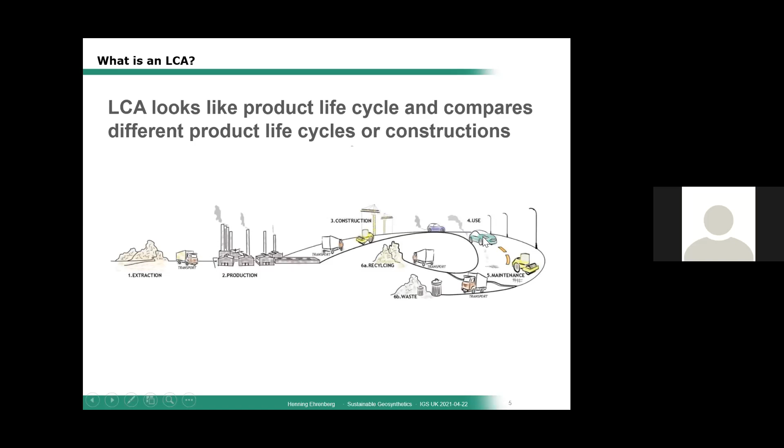Before starting with sustainability overall, we have to have a closer look at what an LCA is. An LCA always looks at the full product life cycle and compares different product life cycles or constructions. That means you do not look at only one single product for production and then stop when you supply it. You look at the whole construction, the whole production, getting the raw material, and then compare these with others. For example, it started with the extraction, and in the early days of LCAs - that was also the case in the early ones we did with the EAGM - it ends with the use of the material. With the newer ones just under preparation, coming in the next years, it goes a bit further until the moment when you recycle these products, or if recycling is not possible, put it into waste.

LCA looks at different aspects: the energy, the resources, what happens with climate change, what is with ecological impact, and also human health is an issue for an LCA. These can be one of the main parts of the sustainability analysis.

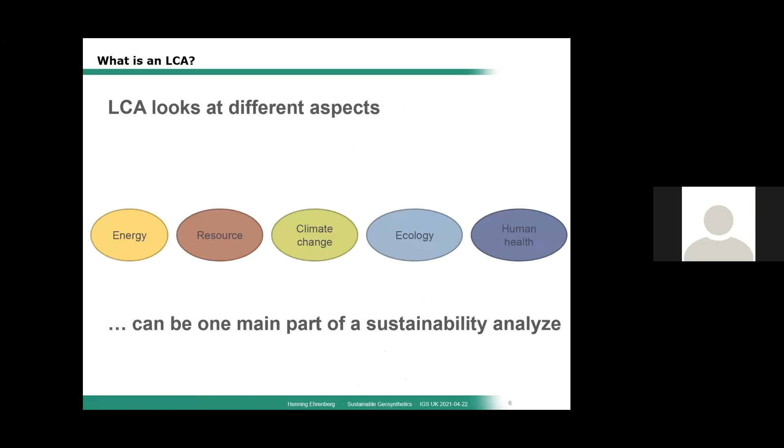If you look at the LCA, there are some main evaluated impact categories, and that, for example, is done also with the LCAs done by the EAGM. It's mainly looking at 9 impact categories.

You can see them here: greenhouse gas emission, particulate matter formation - what that means are effects that cause damages to a person, for example if you get problems with your lungs, if you have gases.

Summer smog, eutrophication - that is a part of the pollution in nature, similar with acidification. Land use is a part where you can see it in 2 different ways. One way is that you only compare 1 square meter to 1 square meter, for example in a road, or you can also identify if there are impacts on biodiversity. In these cases, especially with LCAs in construction, the difference is in how you use land use.

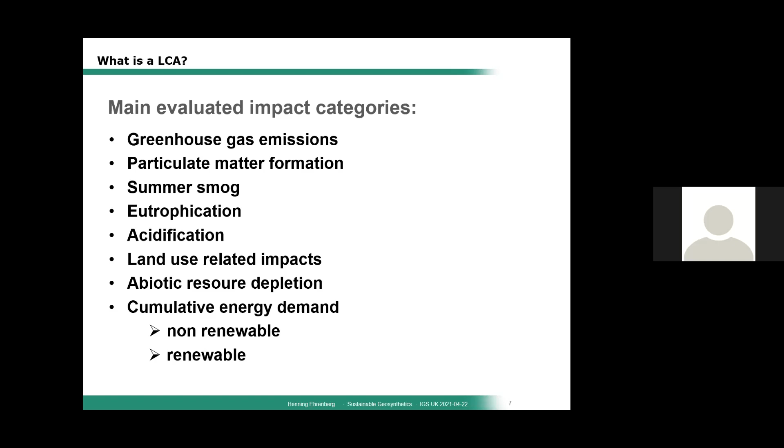Then we have the abiotic resource depletion - that means something like, for example, coming from gas. And you have the cumulative energy demand based on the non-renewable and also the renewable.

For today, we have some examples in more detail. We have the 4 LCA cases done by the EAGM in 2009 to 2011, renewed in 2019. We have a very nice case from ABG, from David Shercliff, presented first time in 2019. We have then 2 cases done by Naue, and also a new thing coming from Huesker, which I will go into in more detail.

We also have some more that I'd just like to highlight - there are more examples, and you can find literature for this, like circular economy, biopolymers, other LCAs, and for example one thing done in the UK in 2010 under the name or letters of WRAP.

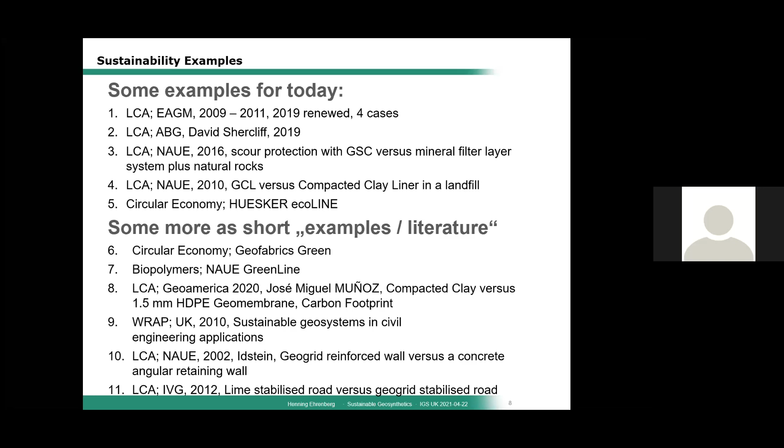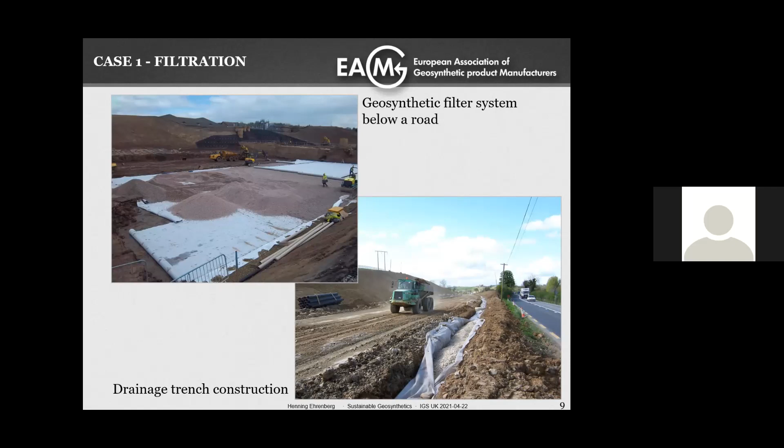Let's start with case 1 that we did with the EAGM. In that case, there was a comparison of a filter system below a road, comparing the impacts of installing a road with a gravel or granular filter versus a geosynthetic filter. You can see the differences here. In the upper part, we have a granular filter roughly 30 centimeters thick. In the lower part, we took a standard geotextile used in these kinds of applications - PP non-woven with 175 grams per square meter.

The main point of this LCA was to analyze only the differences. So everything done in exactly the same way in both cases is not part of the LCA - that's also not part of the other LCAs. It's always only a close look at where you have differences between one case and the other.

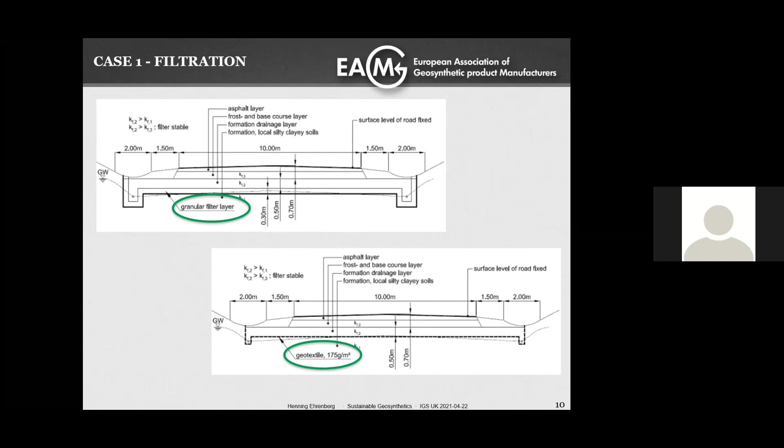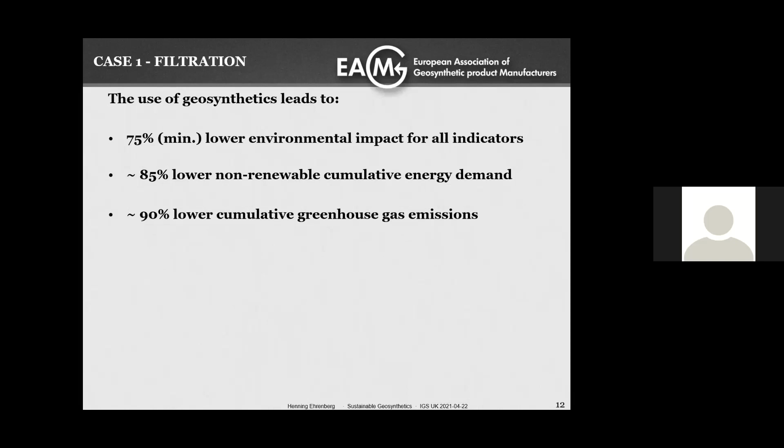So to summarize a bit, case 1 shows a much lower environmental impact for all categories. For example, if you look at the cumulative energy demand and CO2 emissions, we always have less than 20% of what we would have if we made the construction with gravel.

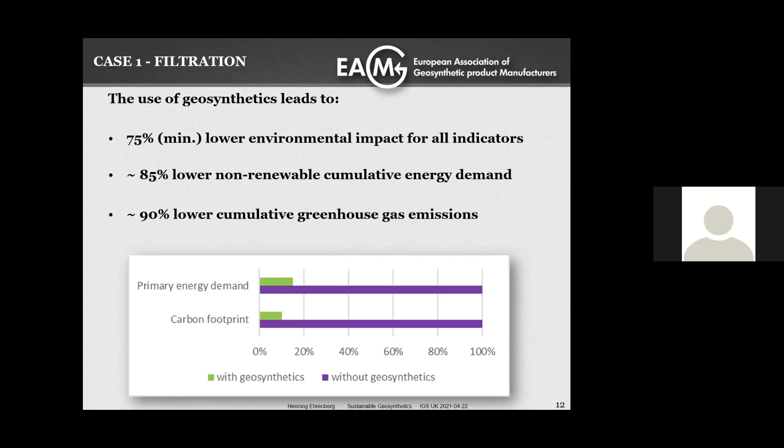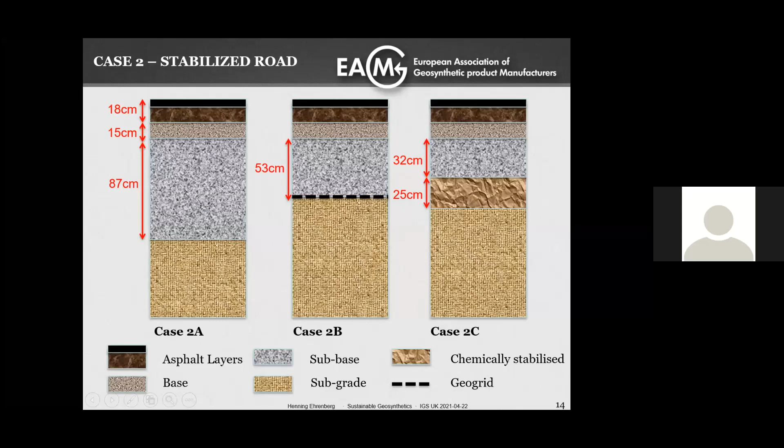If you go to the second case, that's a stabilized road, where we have the comparison in three ways: one is the change of more sub-base material, the second is installing a geogrid or geosynthetic, and the third is stabilization of the soil with lime or cement. Here you can also see directly the differences in the height of material that has to be changed or worked on.

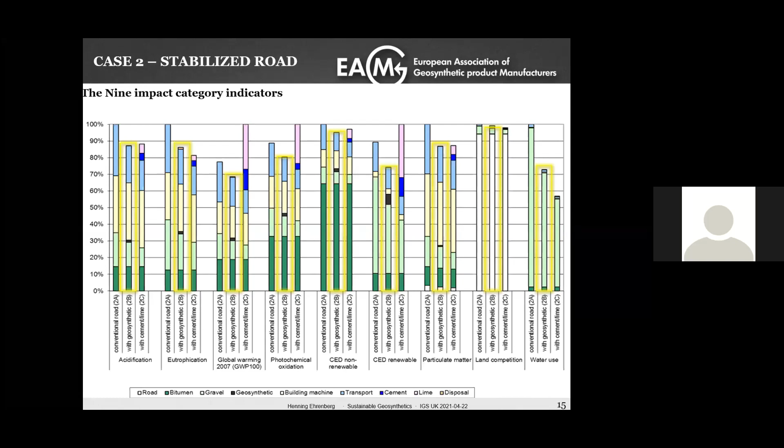These columns are a bit more, so you have to have a closer look. If you compare the classic construction with more sub-base material instead of using the geosynthetic, you can see that the number with the geosynthetic is always lower. If you compare it with cement and lime, the result is on average more or less similar.

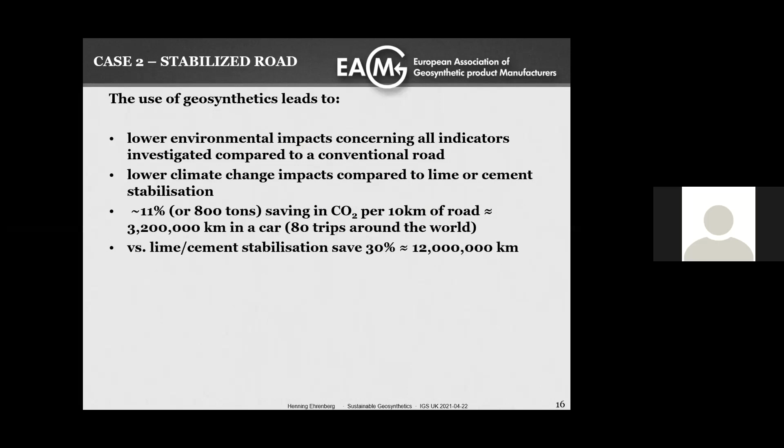But if you go into the details with the cumulated energy demand and CO2 emissions again, you can see that here the level is also a bit lower, but this depends clearly on the detailed construction and also on transportation ways.

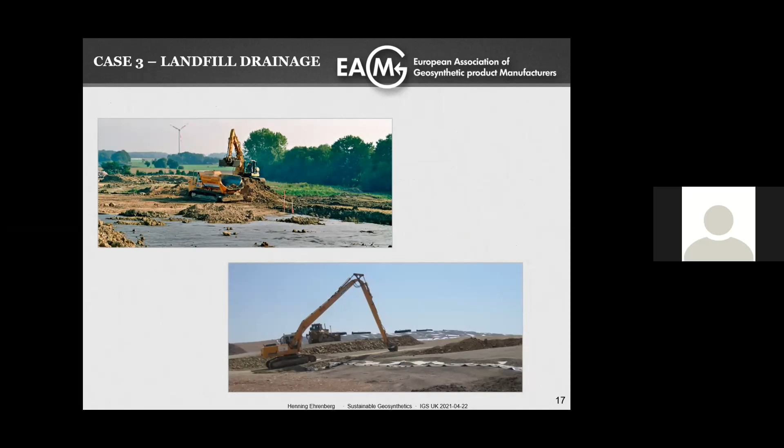The third case done in the EAMG was a landfill drainage comparison, where we compared the impact categories of a geosynthetic drainage layer with a gravel drainage layer. We took the European landfill regulation and compared these. Again, here we only compared the drainage layer, not the filter layer on top or the protection layer below, because those are the same in both cases.

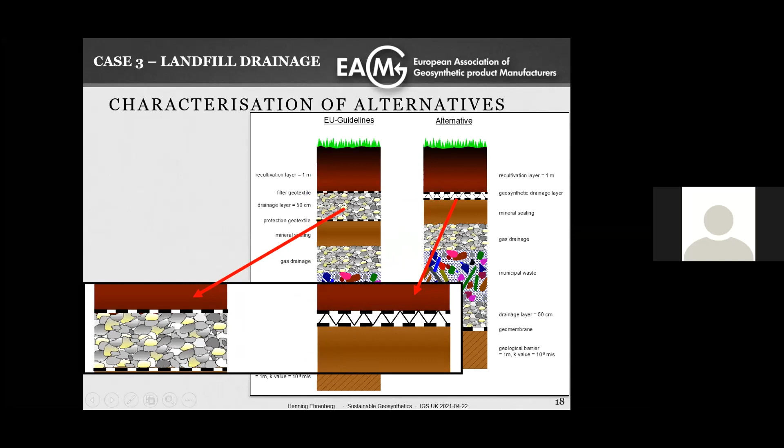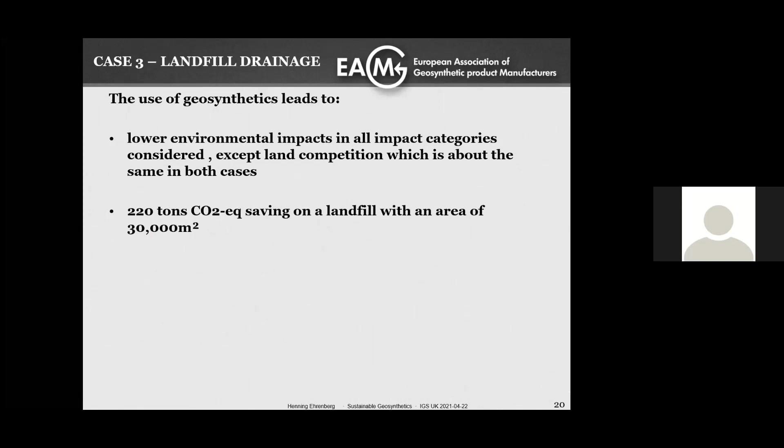If you compare these results, again, as in case 1, we have a higher difference between the classic construction with gravel material in comparison to the geosynthetic material. For example, in the case of cumulated energy demand and CO2, we have a reduction with the geosynthetic construction of 55 or 70%.

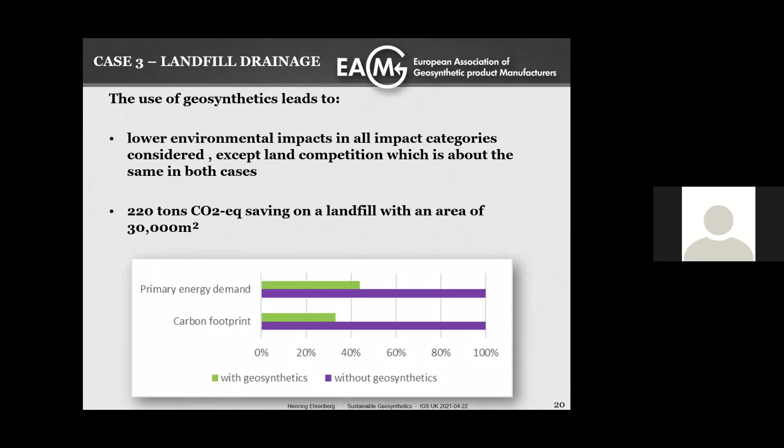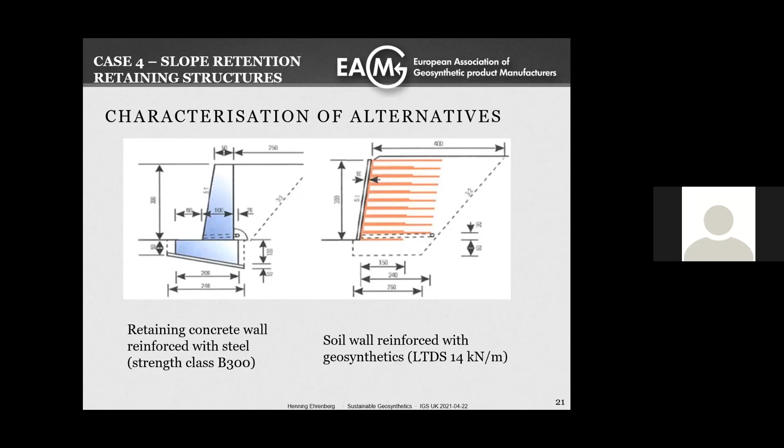Coming to the last case we worked on in the EAGM: the slope retaining structure. In one case with a concrete wall, and in the other with a geosynthetic reinforcement. For the geosynthetic reinforcement, we took as an industry average a geosynthetic with a long-term design strength of 14 kilonewtons per meter. Here are some typical pictures of the surface we could have for a retaining wall with concrete or with a geosynthetic reinforcement behind the surface.

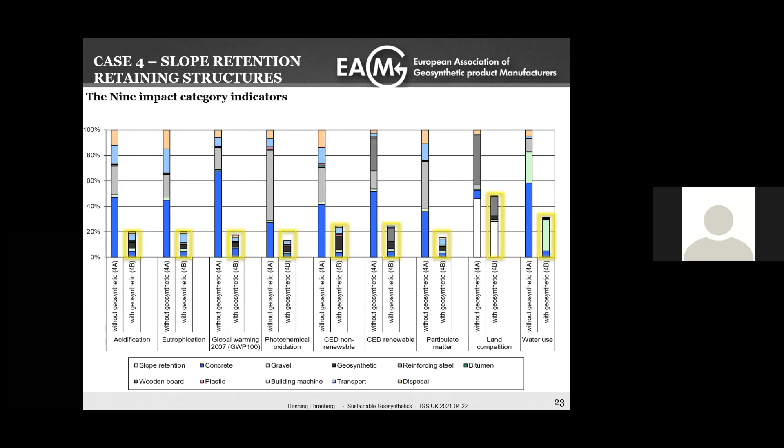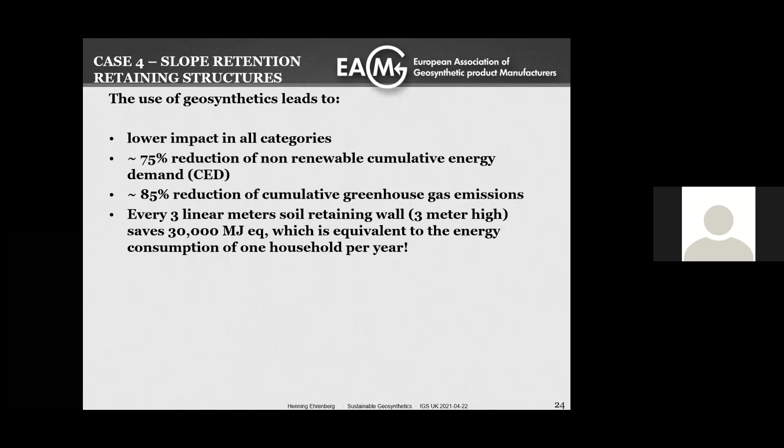Here again you can see a big difference between the construction with the geosynthetic versus the classic construction with concrete, where in most cases you have more than 70% reduction of the impacts with the geosynthetic. Especially with the cumulative energy demand, you have a reduction of 75%, and 85% reduction of the carbon footprint.

So in summary, you can say that geosynthetics can significantly reduce the impacts in most or nearly all of the 9 impact categories in a construction. And there's one main thing you have to know.

We speak about an LCA, and you might have heard of environmental product declarations. That's something some producers have for their products, and they are sometimes used on site. An environmental product declaration is very helpful for doing an LCA, because much of the data needed for a project-specific LCA is in these declarations. But an environmental product declaration alone cannot solve these questions — you really have to compare the constructions, not just the products, based only on an environmental product declaration.

More details of these studies done by the EAGM can be found on the EAGM webpage, and there are also several presentations available, for example at the EuroGeo 5 or at the IGS conference in Berlin, given by one of the people who did this LCA for the EAGM.

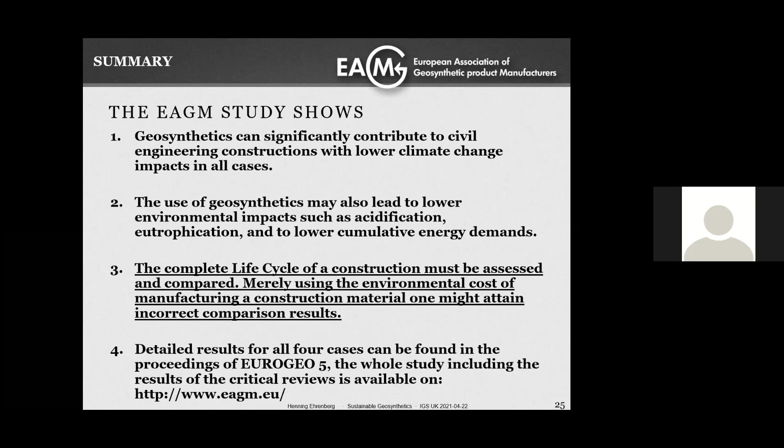Coming now to another example that is not done by the EAGM, but by a producer of products, ABG. This was presented by David in November 2019 at an IGS session in Prague, where he demonstrated the differences between two possible drainage materials in the construction of a highway.

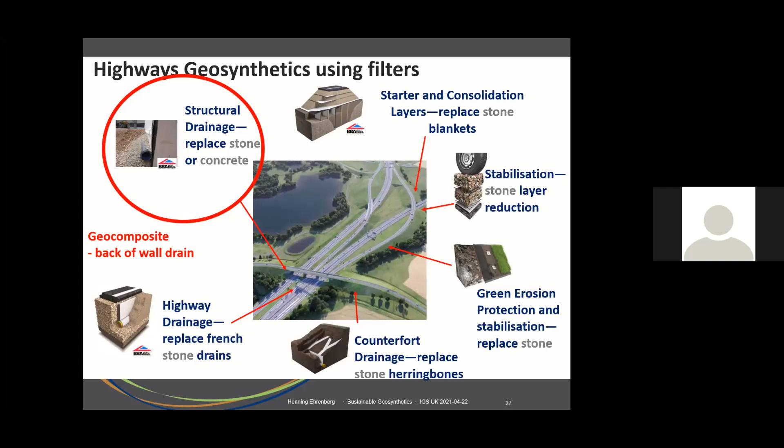You can see it's a highway in UK from Huntingdon to Cambridge. Originally there was a request to install a hollow block concrete system as the drainage material. There was a nice aspect to this project because all participants were asked to provide a calculation or environmental impact statement regarding possible alternatives to save CO2 emissions. The owner was very open to alternatives, mainly evaluated through impact statements.

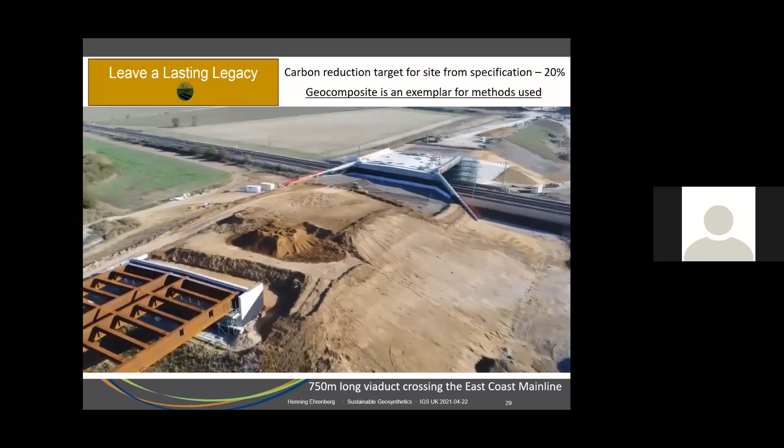Here you can see one of the bridges, for example a bridge or road that was or will be constructed to save travel time and reduce the traffic jams experienced daily in the past. Once finalized, I don't know if it's finished today, but it will save significant traffic jams and travel time.

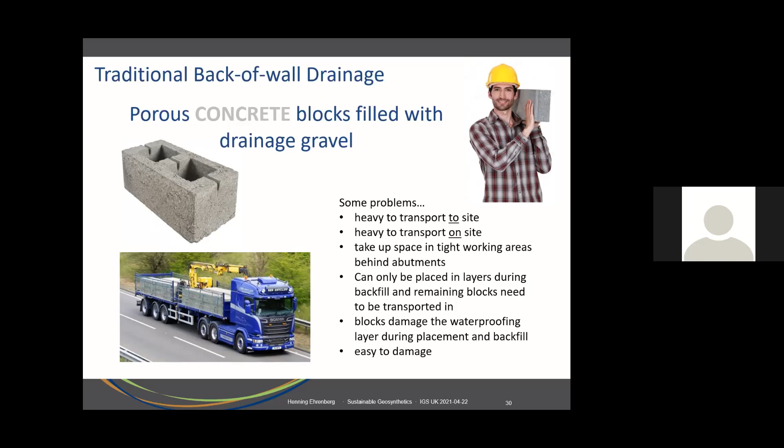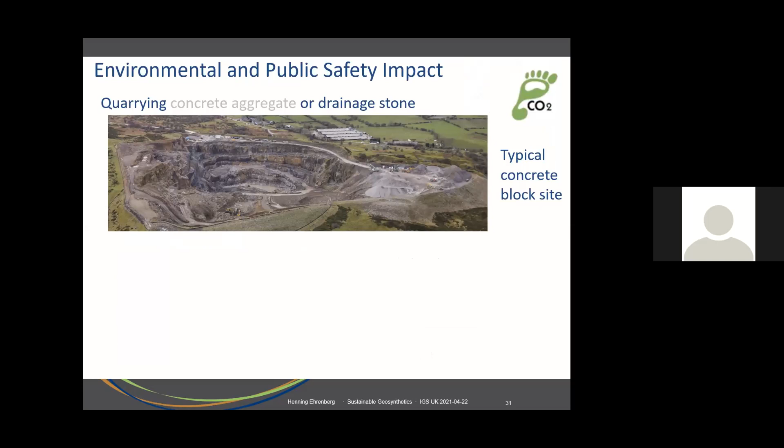As I said, originally the tender asked for a back of wall drainage using hollow blocks. You can see the typical issues with these materials: problems with heavy transport to and on site, requiring many trucks. For example, producing these concrete blocks involves high use of natural resources, as shown on the upper part of this slide, and the many trucks cause problems for public authorities and damage existing roads.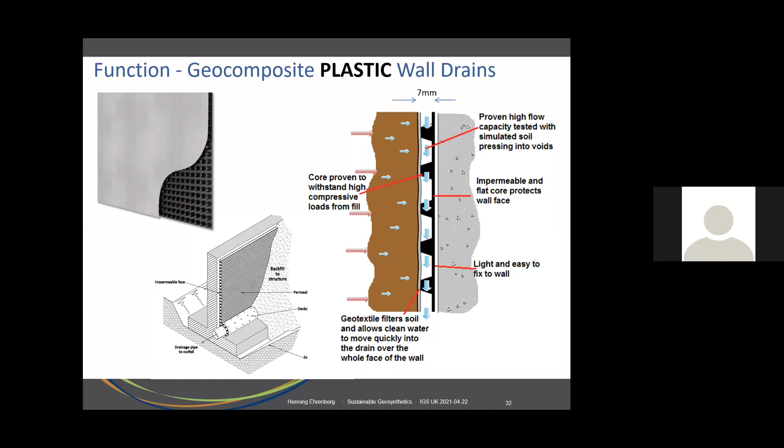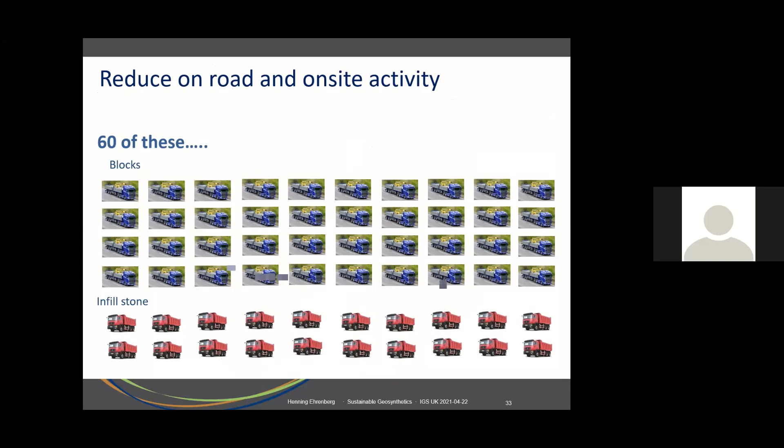In comparison, the plastic wall drains show here the principle of the material with a filter and a drainage layer, and one of the big benefits. If you have to transport all the block wall material to site, you need many trucks for the blocks and more trucks for the infill stones. For the same surface area you would drain, here you only need one truck to transport the drainage material to site.

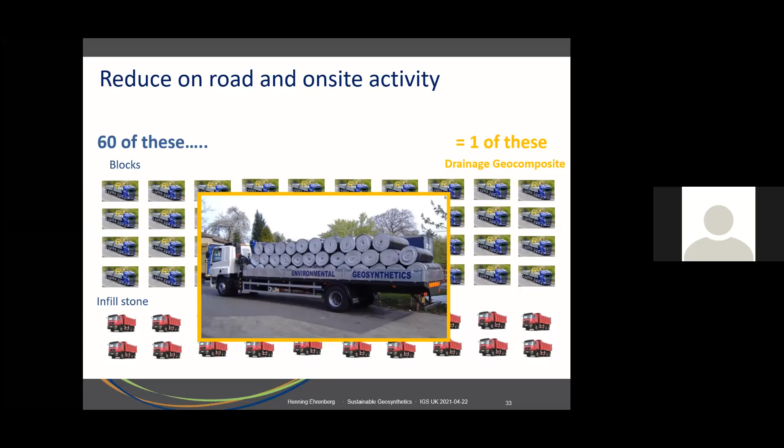Similar questions arise with transportation on site. For example, if you have 550 of these blocks covering a certain surface, you can drain the same surface with only one roll of this material. All of this has to be transported and also installed on site.

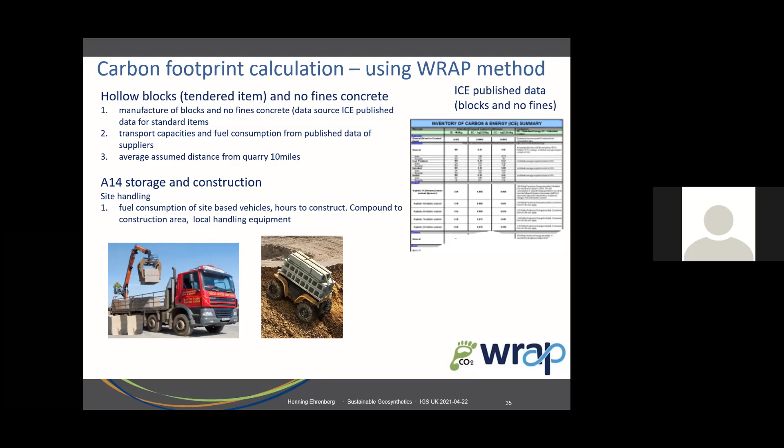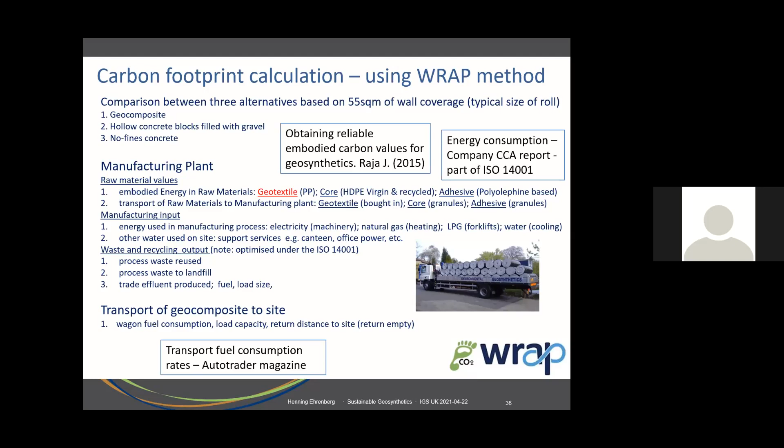One thing also done as part of this evaluation, requested by the owner, was a carbon footprint calculation using the system WRAP. WRAP was developed roughly in 2010 in the UK and serves as a base for LCA calculations on site, providing numbers and guidance. Calculating this for the hollow block system and doing the same correctly for the geosynthetic drain, you get a reduction of CO2 emissions with the geocomposite of roughly 91%.

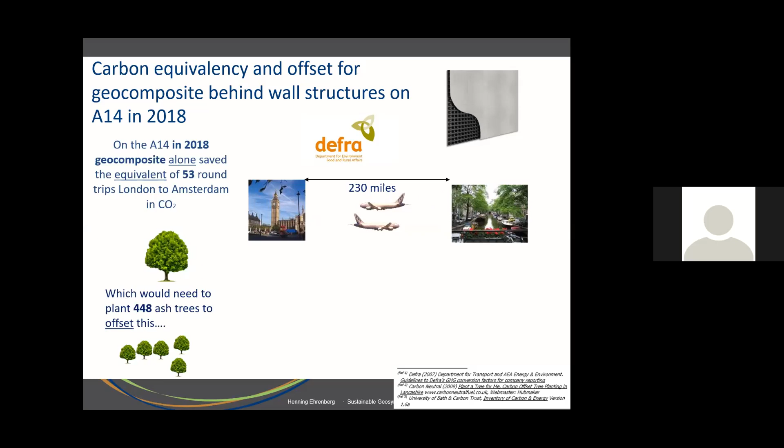What does that 91% mean? There's a nice example from Defra: he said this would save the CO2 emissions equivalent to 53 round trips by plane from London to Amsterdam and back, or alternatively, the number of ash trees needed to store that CO2. I think this example clearly shows how much CO2 emissions can be saved with geosynthetic construction in that case.

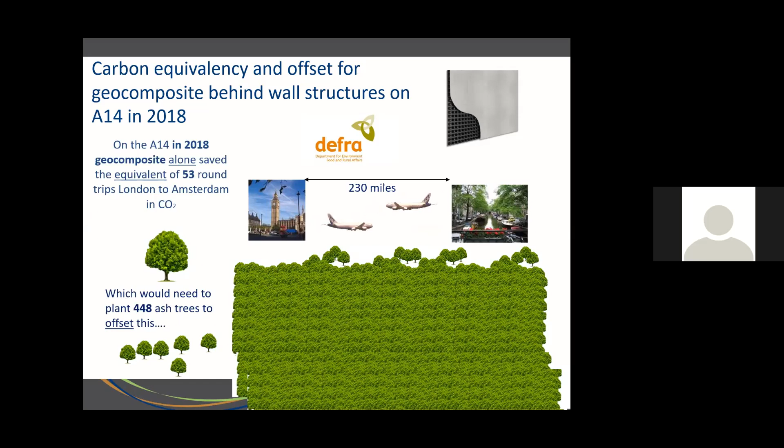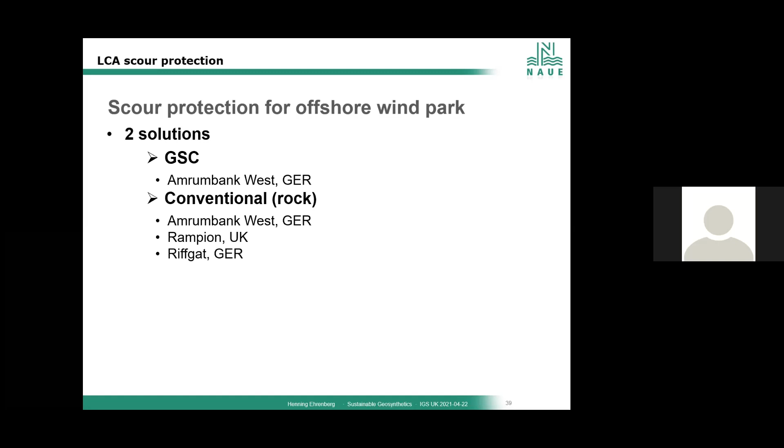Originally the tender required a conventional rock system, and the alternative solution was to build the scour protection using geosynthetic sand containers instead of rocks and sand. Not only was the geosynthetic sand container version as installed in Amrumbank West compared with the tendered version, but two other offshore wind parks, Rampion and Riffgat, were also part of this comparison.

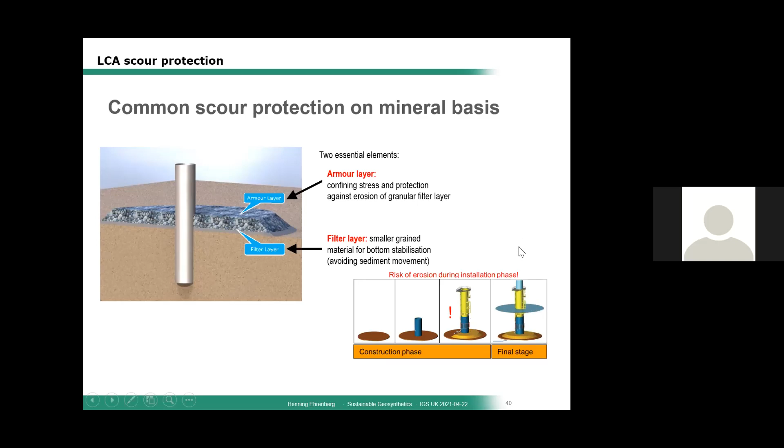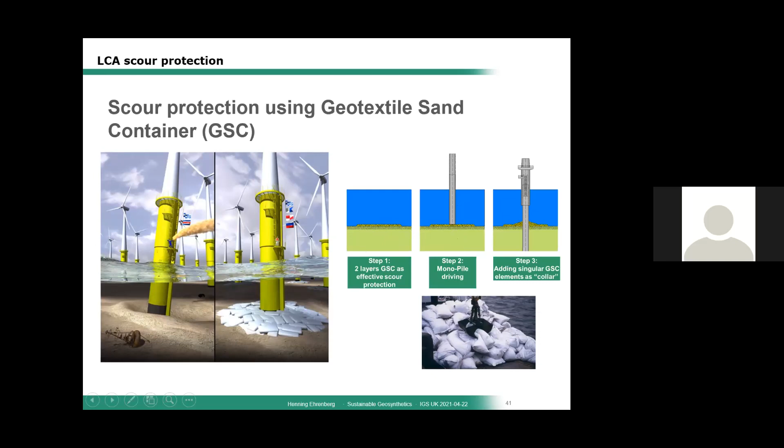Alternatively, you can do this with geosynthetic sand containers. In that case, the procedure is a little different. You install first the scour protection, then you install the monopile. Without damaging the monopile, you can push it through the scour protection and then finalize the monopile.

In this comparison, there was a comparison of the whole production of the geosynthetic sand containers, with all the raw materials, the sand filling, the installation, and the operation and end of life, calculated with end of use after 25 years. In comparison, there was the mining of the gravel or rock, the installation, the operation, and then the same end of life.

In both cases, there's no maintenance. And there is, after 25 years, the end of life.

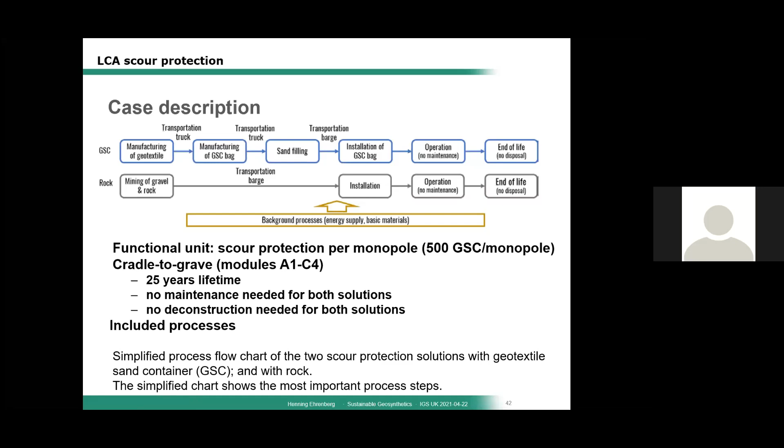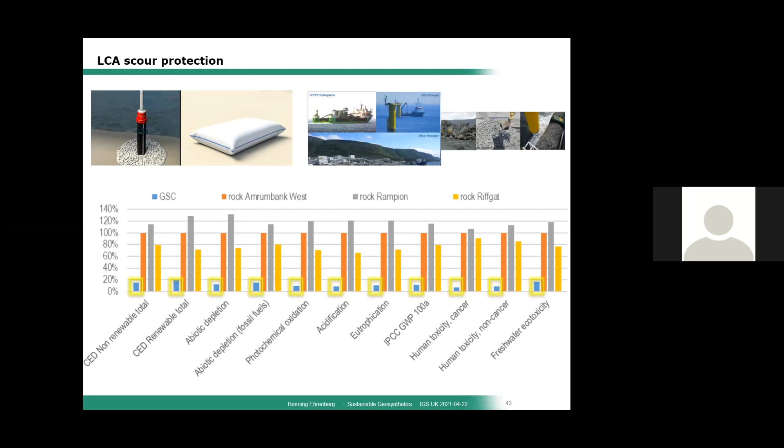You have to keep in mind what is not part of the LCA here: the loss of natural resources, because, for example, you have to take all these rocks from Norway via ship.

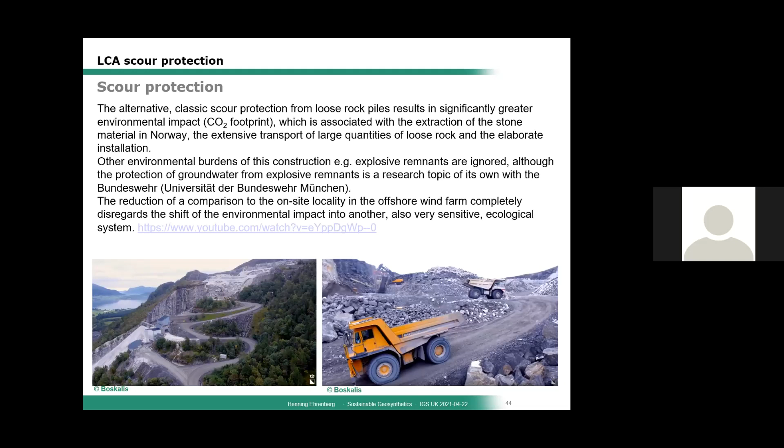The next comparison is between a compacted clay liner and a GCL. I have to say that the following comparisons are mainly done for carbon footprint and cumulated energy demand, or for example also for cost comparison. It's not done for all 11 impact categories as before, but the results are more or less the same.

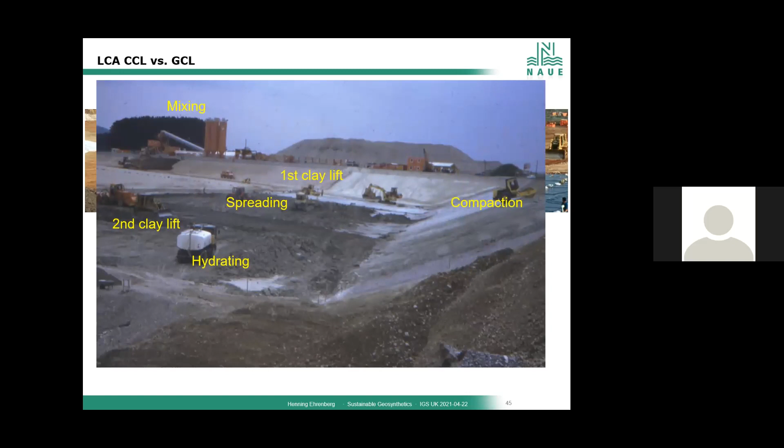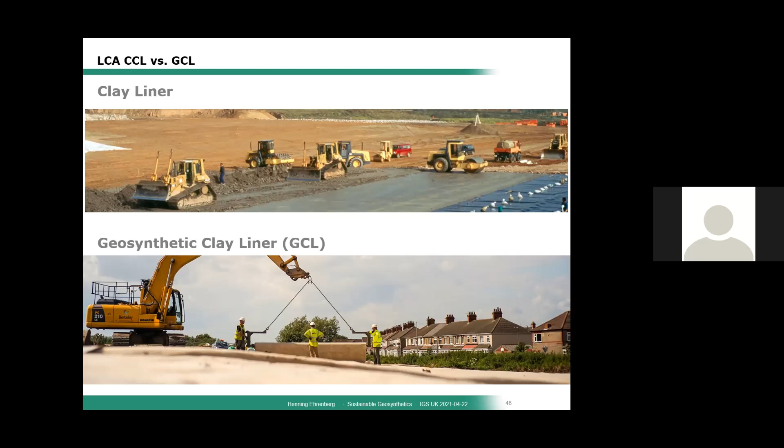One thing you must keep in mind is how much water is needed for a compacted clay liner. Not everybody considers this, but to install a compacted clay liner you need the exact right amount of water, depending on the liner, to achieve the correct density. For example, for an area of 40,000 square meters with a thickness of 0.5 meters, you need 2,300 cubic meters of water for the installation process.

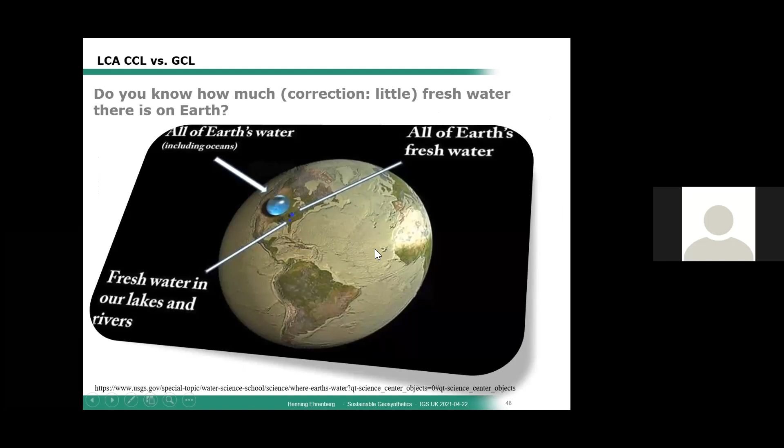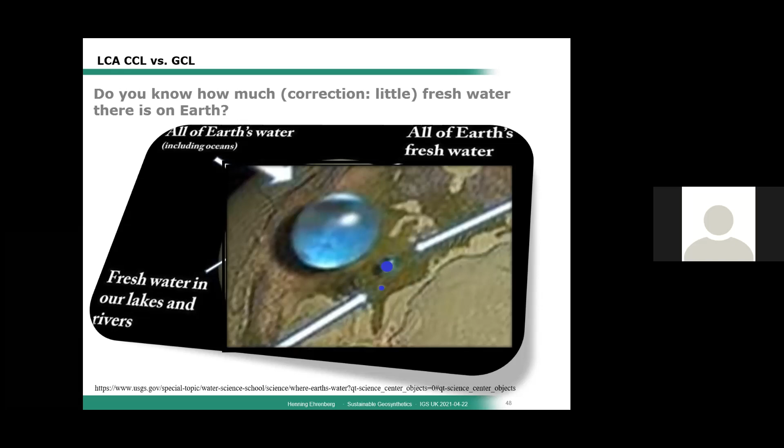This is a very big amount of water, especially considering how much water we really have on Earth. You can see here our Earth, and how much water we have on it. This is this dot, you can see with a very, very small dot how much fresh water we have. And there's an even smaller point, the fresh water we have a connection to, where we can get it directly from nature. So the water that we have is a resource worth saving.

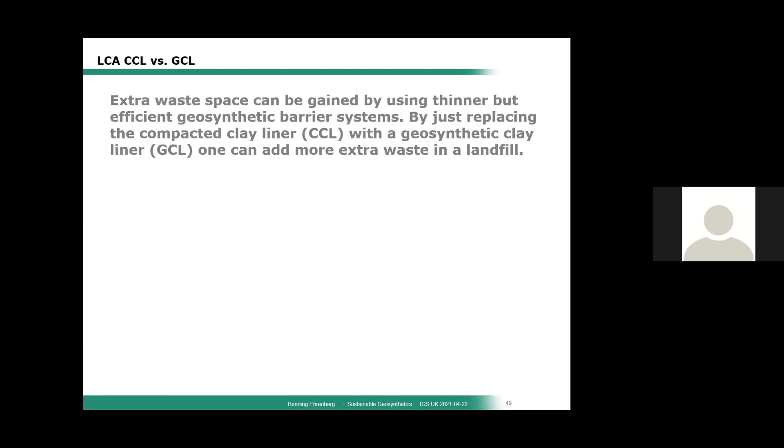What you should also keep in mind is that if you install a GCL instead of a compacted clay liner, you can fit much more waste in a landfill with the same cubature, because you save roughly 49 centimeters on top of the landfill and 49 centimeters on the bottom of the landfill, and so you can install much more waste in the same landfill.

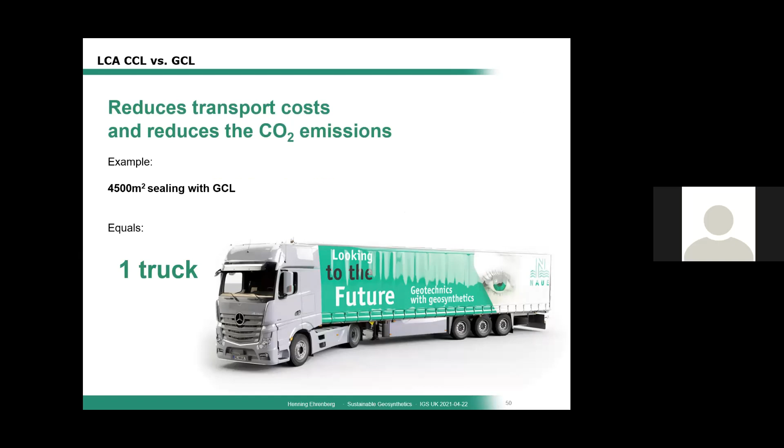If you look at the CO2 emissions, you can imagine the impact of just the transportation. In that case, you can fit roughly 4,500 square meters of GCL on one truck, whereas for 4,500 square meters of clay you need a much larger amount of trucks. So, similar to the examples we had before, for example from ABG, you have to keep in mind the impacts these have on nature and on the people living around the construction.

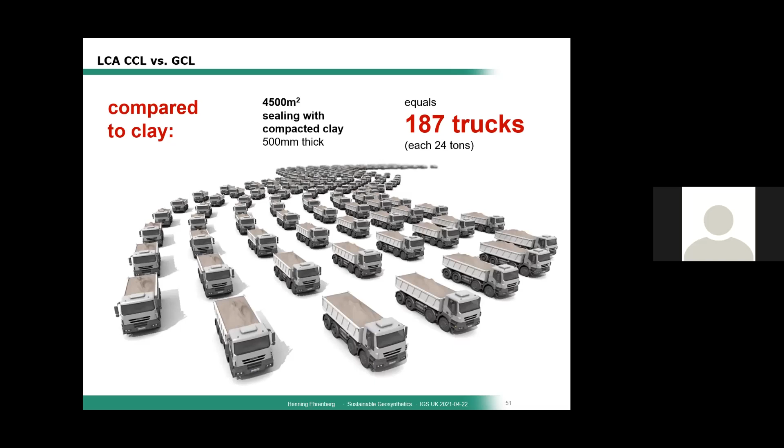If you calculate the cumulated energy demand, for example, for a landfill cap with 36,000 square meters, you will find a reduction of roughly 40% of CO2 emission, of accumulated energy demand. And if you compare these, for example, for the CO2 emissions, you have roughly 60% less CO2 emissions when you use, instead of compacted clay liner, a GCL.

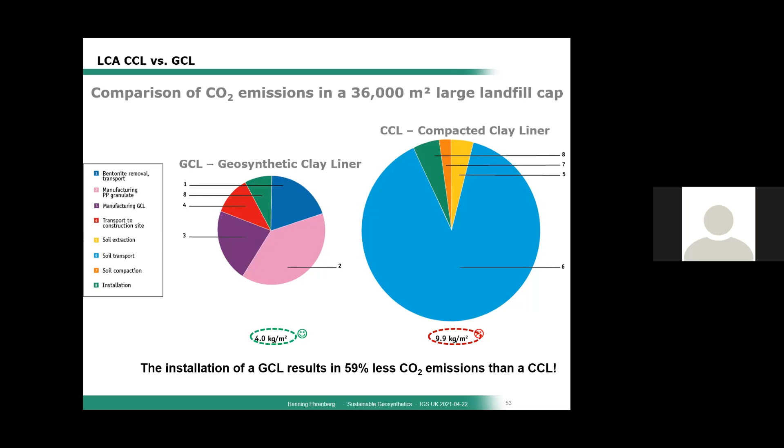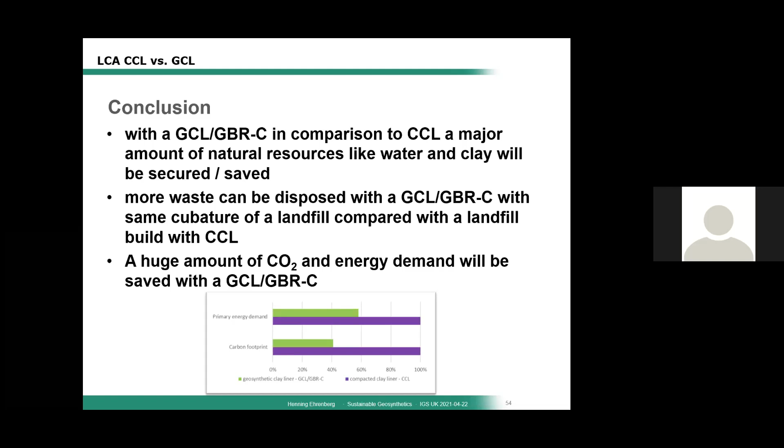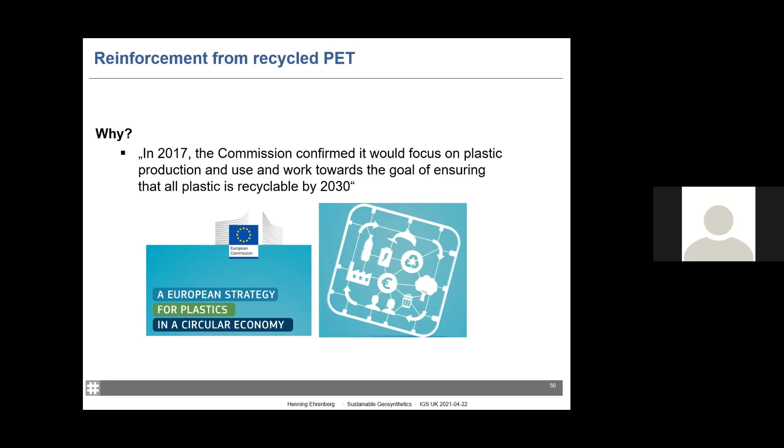And why this? It's coming maybe from the idea that is published in 2017 from the European Commission. At the end, it is a big discussion that we have actually in the industry following the approach of circular economy, where we should have in future more and more use of recycled material and the possibility also to recycle this material. In this case, you can see, for example, from bottles, in that case from shredded PET bottles, to regrind this material, and also with the polymerization of this material to produce a granular

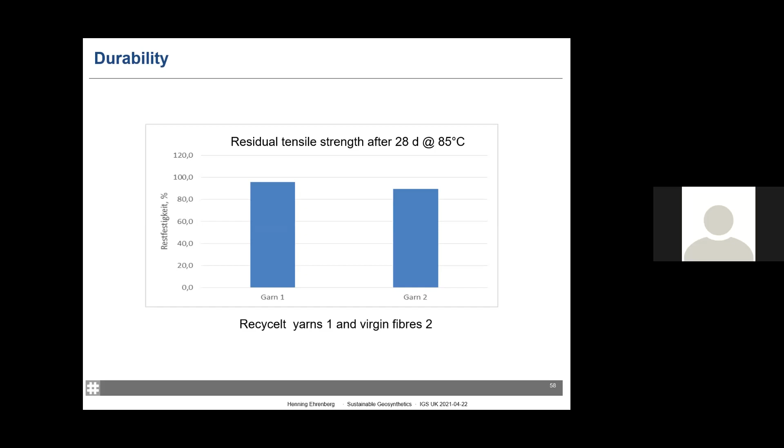So recycling is also something that has to do with sustainability. And in that case, it's not only sustainability, it's also a reproducible quality.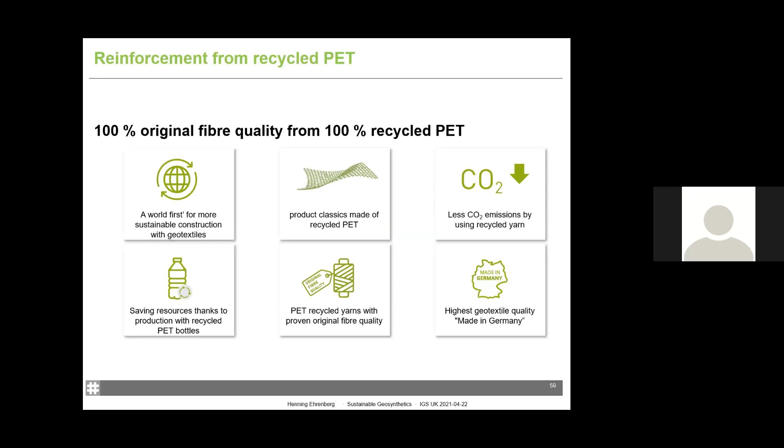And also with these kinds of productions, you can reduce the CO2 emissions because this material can be used and recycled. For example, if you see these values, you can reduce the CO2 amount that is needed or that is produced during a production for a quantity that is, for example, the same as a football pitch. You can reduce the CO2 emissions in such an amount as you, for example, will produce with a car where you travel 40,000 kilometers.

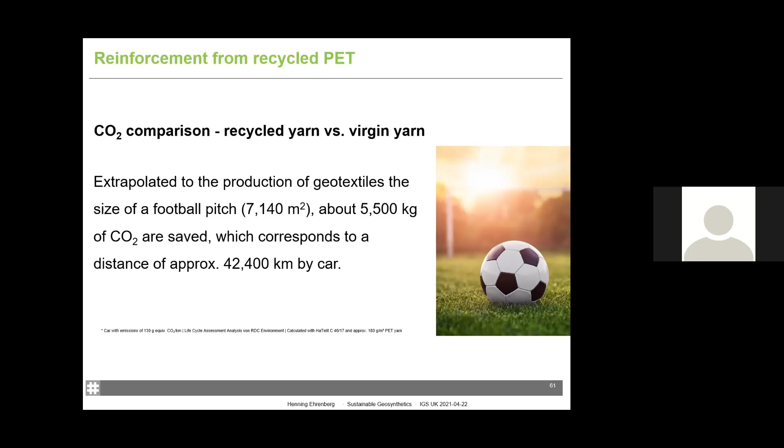One more example going in a similar way is that recycled polyester is also used in Australia for the production of nonwovens. So a little bit different to what is done here in Germany with a reinforcement product, but in principle it looks similar. In that case, the producer has two new product ranges. One is Bidim Green, which is recycled Australian plastic bottles, and the other is the Eco material where it could be all kinds of polyester bottles as the basis. At the end, it will be also recycled, maybe condensed, and then used as raw material for fiber production.

What you should have in mind is that sometimes these kinds of products are a little bit more expensive than the classic materials because the recycling process actually is a bit more expensive. But if you see it from the ecological side, these products definitely have benefits.

One other thing that also has to do with sustainability is the use of natural resources for fibers, or let me say biopolymers. You can see here 4 different grades of materials. You see the blue one that is a fossil-based material and not biodegradable. And then you can see the green ones that are more or less named under the umbrella of biopolymers with different values. Sometimes they are bio-based and biodegradable, or they are biodegradable but fossil-based, or bio-based and not biodegradable.

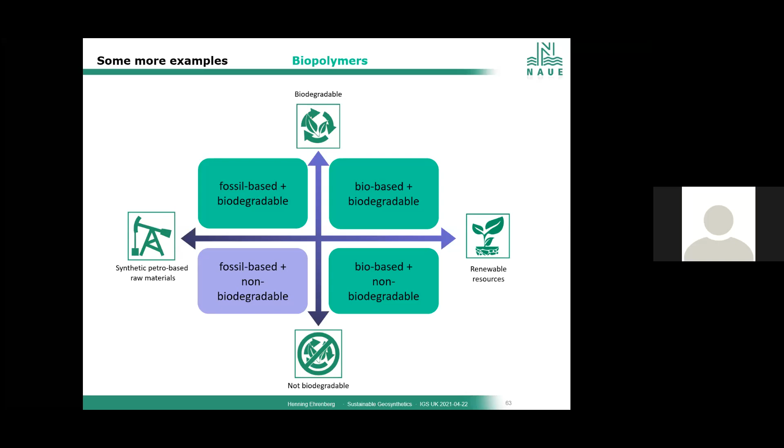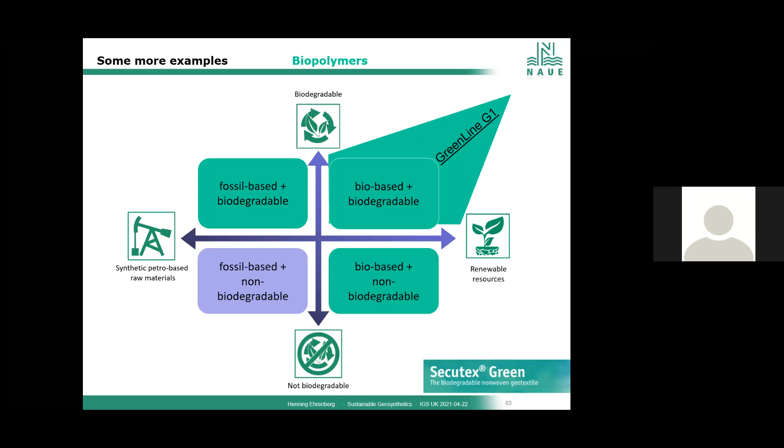And there's also a new product available called Secutex Green. For example, the GreenLine G1 is a bio-based and biodegradable material. And in comparison to other materials in the past, this is a material that is really produced from industrially produced natural fibers. So there are sources behind that always produce the regular fiber with a very, very low variation, and you can produce quite good and reproducible materials.

And if you see these then in the whole way of production until dismantling or industrial composting, biological degradation, you have with these kinds of products new possibilities depending on the application and where you have to use these kinds of products. So they have some benefits, and these products are new and definitely also sustainable.

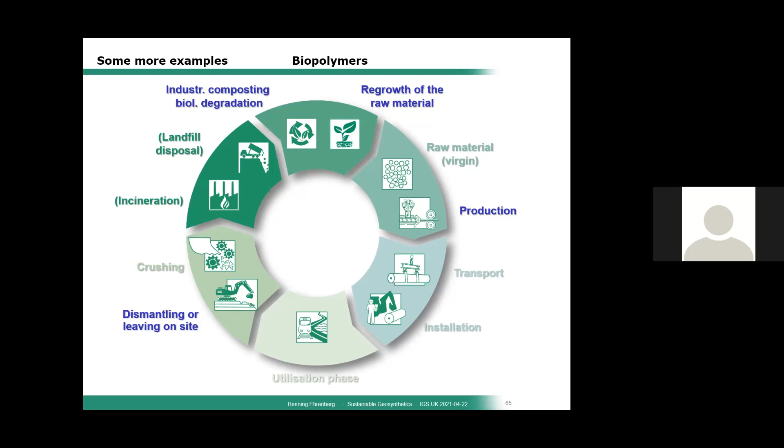If you look around the world, you find other examples comparing different materials used in construction. We had a few minutes ago the comparison between compacted clay and a GCL. That was an example from last year from GeoAmericas, where a colleague presented a summary comparing a geomembrane versus clay, done by Sotrafa. Here you can see the two construction technologies: on the left side the compacted clay liner, on the right side the geomembrane, along with the CO2 emissions produced by installing and producing the materials for 10,000 square meters. There's roughly a 70% reduction with the geomembrane compared to the compacted clay liner.

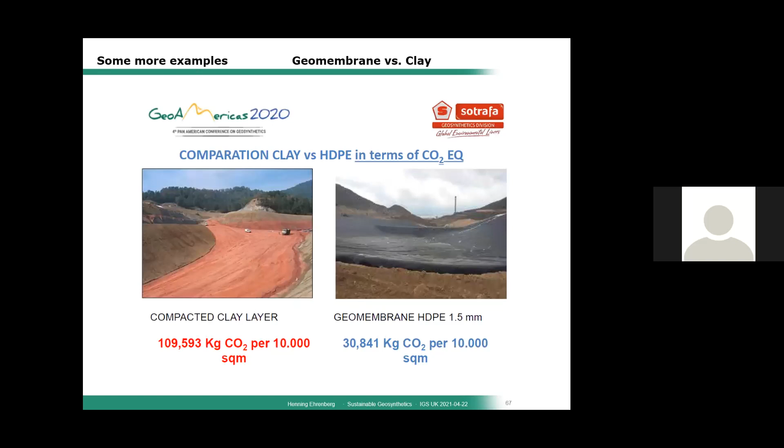There are also other benefits with a geomembrane, for example the material lasts longer, and the installation procedure is much easier. So you see these comparisons between classic construction and construction with geosynthetics.

Only one more slide. Most people from the UK will know this, as I mentioned before with the presentation from David Shercliffe of ABG. In the UK, a study was done in 2010 on how to calculate and prepare such an LCA. This study is very useful and available, and you can download it online in the UK.

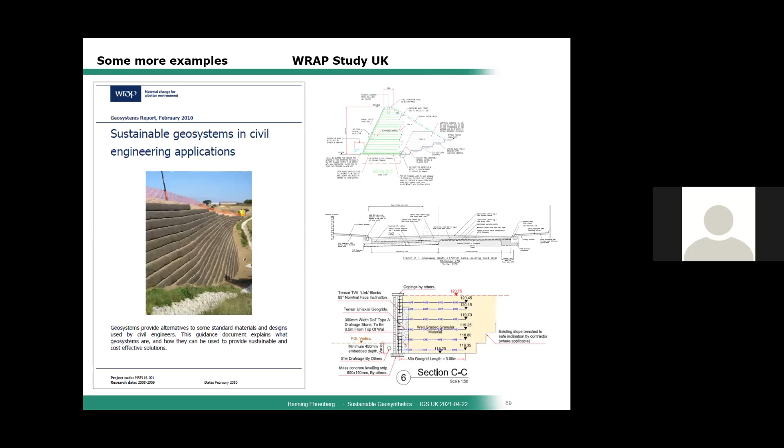There's another presentation similar to case 4 that we had from the EAGM, but in that case it was also calculated on a site that was really built that way. Here the tender was for concrete, but it was ultimately built with reinforcing material. We did a comparison of the CO2 and energy demand, which is different from all the others we saw before, and here we also have a cost comparison.

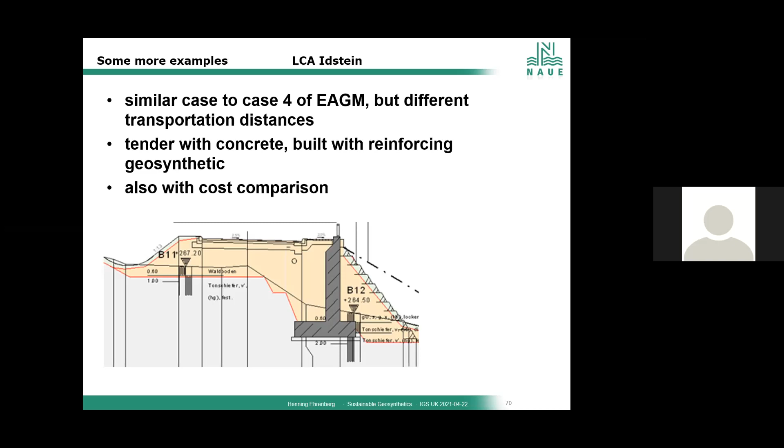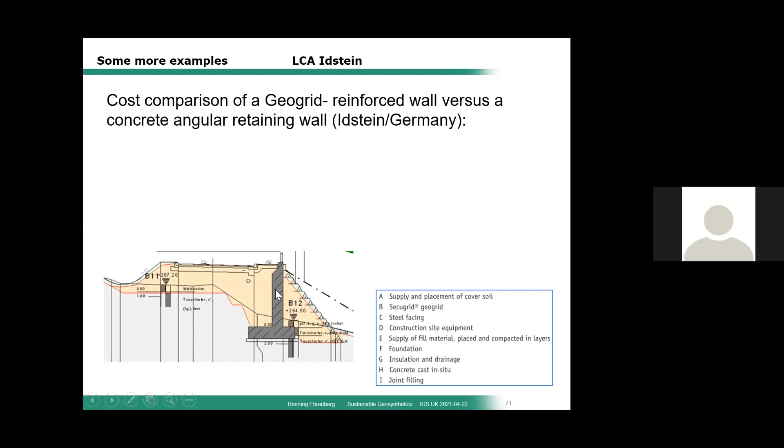Let's start with the cost comparison. You can see the two constructions, the concrete wall or the reinforced wall, and here is the cost comparison. In the end, it was built with the reinforcing product, and due to that, the total construction costs were only about 50% of what was originally in the tender. The savings came to 260,000 euros.

And looking beyond costs at the accumulated energy demand, we have a reduction of 70% with the reinforced material, and in terms of CO2 we save 80% of emissions compared to the concrete wall originally in the tender. Here you can see again the three comparisons.

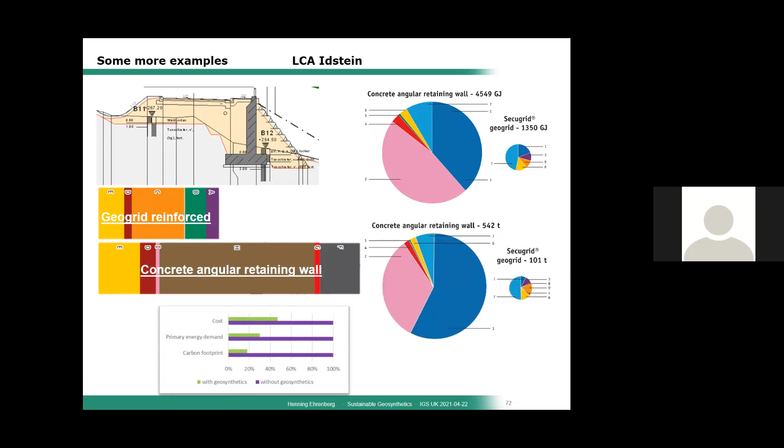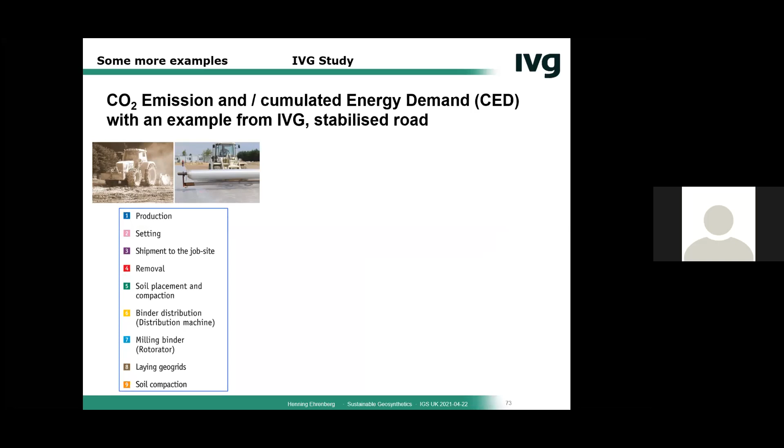A last example I want to show is something done in Germany by the German Association IVG. They did a similar study to what was done with the EAGM in case 2, and here you can also see a reduction of CO2 emissions and cumulated energy demand comparing the construction of a road using geosynthetics versus lime stabilization.

Very nicely, yesterday we had a presentation in Brussels, and our answers could not be more timely than these days. What was presented and decided yesterday in Brussels is that there's an ambitious climate target for 2030, a reduction of 55% compared to 1990 levels, and this is now part of the law. By 2050, Europe should be the first climate-neutral continent.

If you look at what Mrs. von der Leyen said, she really sees this as a big goal for the next years and decades, and a big benefit for future generations. Something similar was said by the Vice President, Mr. Timmermans. I show this only to remind you that the topics we've covered in the last 40 minutes are genuinely relevant, exactly for these days.

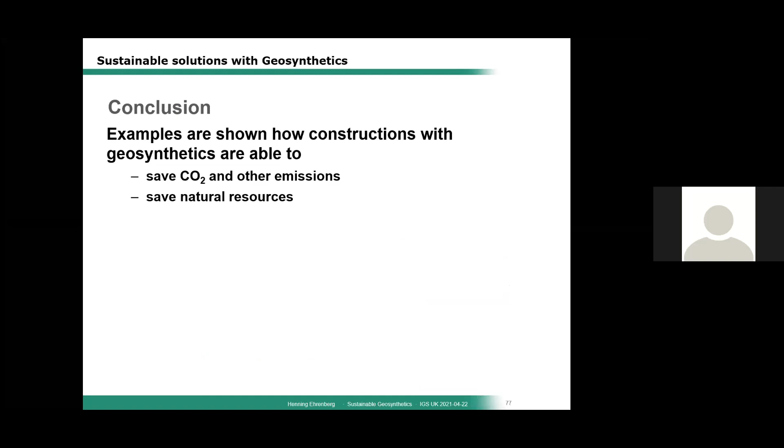So to conclude what I've presented, we've shown examples of different benefits from constructions with geosynthetics. For example, you save CO2 and other emissions, you save natural resources, you reduce the energy demand, you can save fresh water, you can reduce construction costs, and you reduce the impacts on residents near construction sites. So geosynthetics are part of the solution to the questions coming to us in the next years and decades.

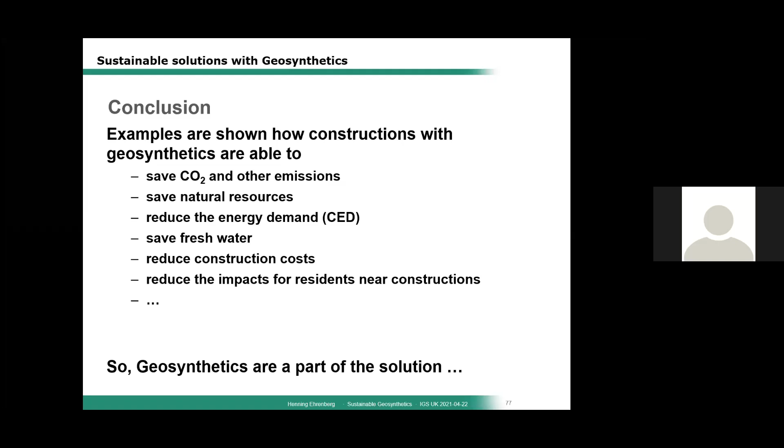And it's not new, but it shall be more recognized that geosynthetics are really convenient products that improve all these ecological and economical tasks for the future, and a big part of sustainable products or sustainable use. To show this, the IGS has founded last year a sustainability working group and is working strongly on these issues.

The EAGM also worked on these and has started new LCAs. As I said in the beginning, in the past the LCAs have always stopped when the products are installed. For the near future, we will also prepare LCAs where the dismantling and then recycling or whatever will be part of the LCA.

So this is the end of my presentation. If you have some questions, we can talk now. Yeah, that's from my side.